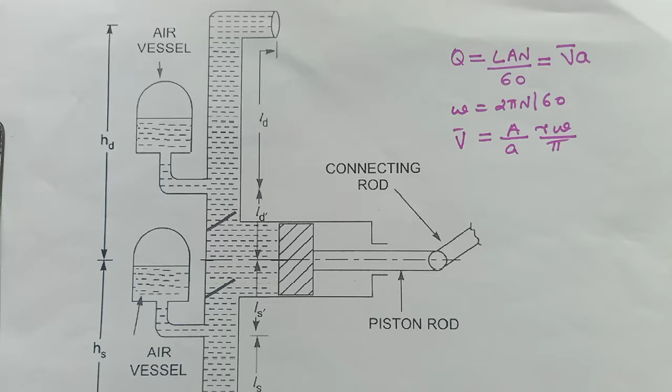Next we discuss the working of an air vessel of a reciprocating pump. These air vessels are fitted especially on single acting reciprocating pumps. The function of this air vessel is when fluid comes into it, the air inside the cavity gets compressed, and as and when required, that compressed air pushes the fluid into the main channel.

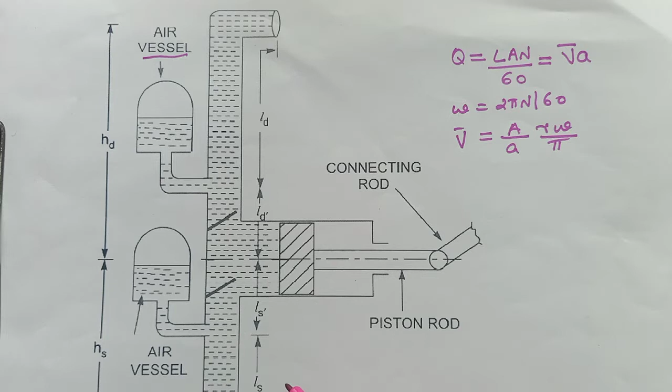So the main purpose of installing an air vessel into the reciprocating pump is that we know the fluid is accelerating and decelerating through the suction side as well as the delivery side. So fixing the air vessel ensures that the flow through the delivery pipe and the suction pipe is almost uniform.

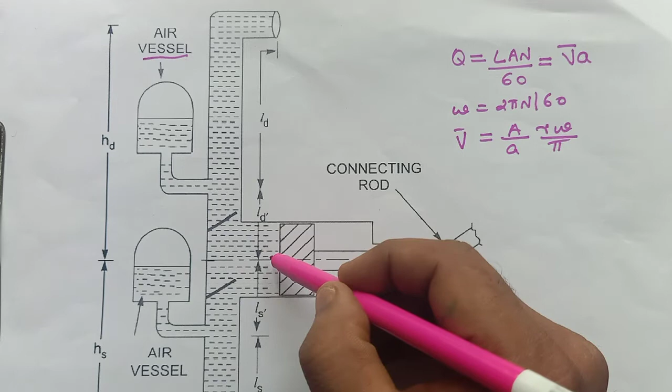This is done by dividing the entire length of the delivery pipe into two parts: the length between the middle of the piston to the entry of the air vessel, and the remaining length noted as LD. Similarly on the suction side, we divide it into two parts: the length up to which the air vessel is fitted is noted as LS dash, and the remaining length is LS.

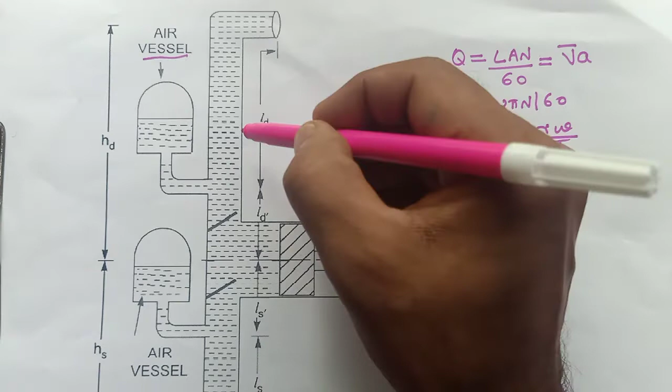So the core purpose of installing this air vessel is to maintain a constant flow rate through the longer section LS as well as the longer section LD. We ensure an average uniform velocity rather than a fluctuating velocity, which would typically occur without an air vessel.

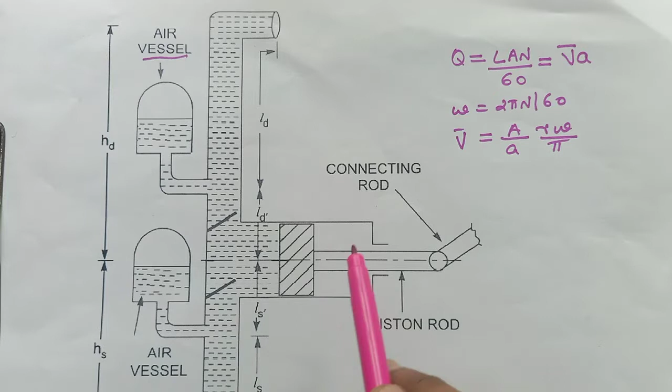Its function can be seen during the suction stroke. While the piston is moving during suction, it is accelerating and then decelerating. From theta equals 0 to theta equals 90, the fluid is supposed to be accelerating. However, the fluid coming through the suction pipe is not sufficient, so the compressed air from the previous stroke allows fluid to move from the air vessel towards the piston during theta 0 to 90, ensuring a constant velocity fluid passes through the suction side.

Then during the deceleration period, from theta equals 90 to 180 degrees, less fluid is supposed to enter the piston, so the additional water coming through the suction side actually enters into the air vessel. So the fluid may accelerate and decelerate in the section LS dash, but we can ensure a constant velocity fluid is moving through the longer length LS.

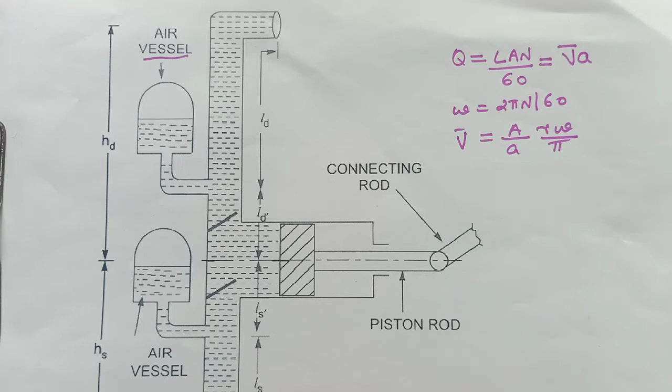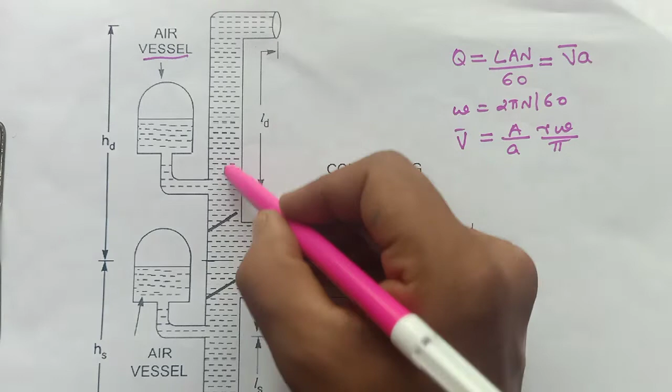The same thing is true with the delivery side. During the return stroke, the fluid is supposed to accelerate; at that time, the fluid compresses the air inside the air vessel, and fluid enters into it. So a constant velocity exists in the length LD, and also from theta 270 to 360, during the deceleration phase, the fluid...

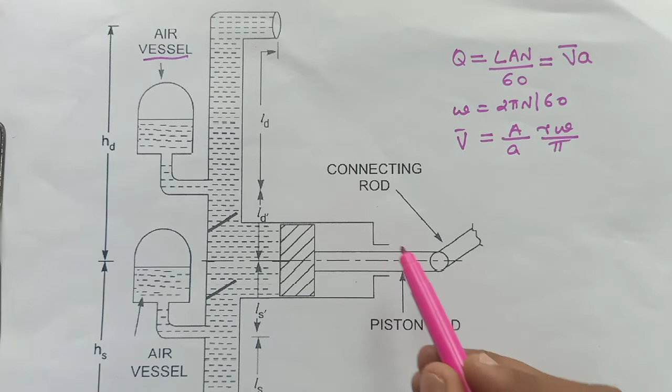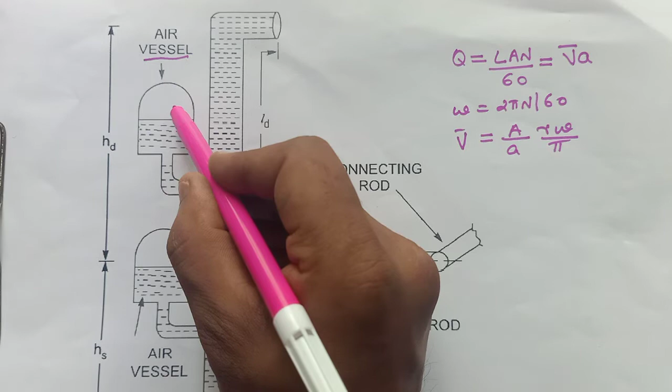The compressed air in the vessel will be pushing the fluid, so that on average we can ensure the fluid is moving with a constant velocity throughout the longer section LD as well as LS. So the flow rate Q is modeled as LAN by 60, which is the fluid actually entering into the piston.

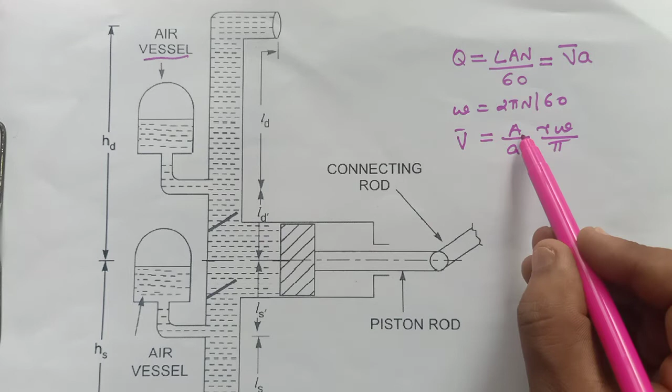So in either branch, the suction side or the delivery side, the fluid is moving with an average velocity V bar, and the area of cross section is A. Further, we know that omega is 2 pi n by 60, so we can model the average velocity through either the suction side or the delivery side as A by A into R omega by pi.

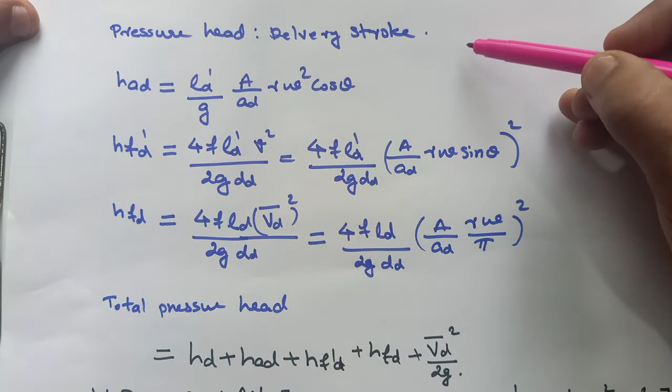Now we discuss the pressure head during the delivery stroke. What happens is the fluid will be accelerating and decelerating only through this length LD dash as well as LS dash. For the remaining LD and LS, we can ensure almost an average velocity V bar.

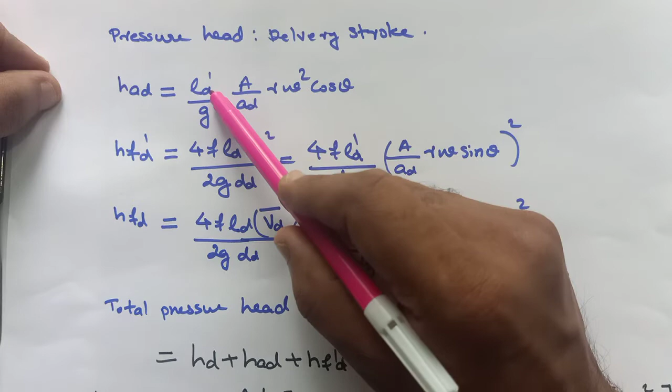So to model the pressure head, the acceleration head is nothing but LD dash by G, A by AD into R omega square into cos theta, as we have done earlier. But note that the acceleration head contribution is only from the smaller length LD dash.

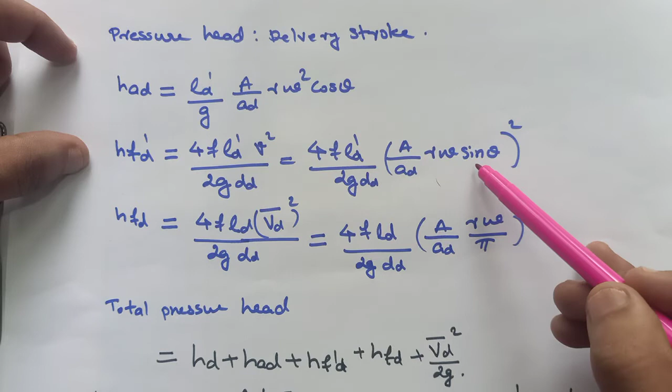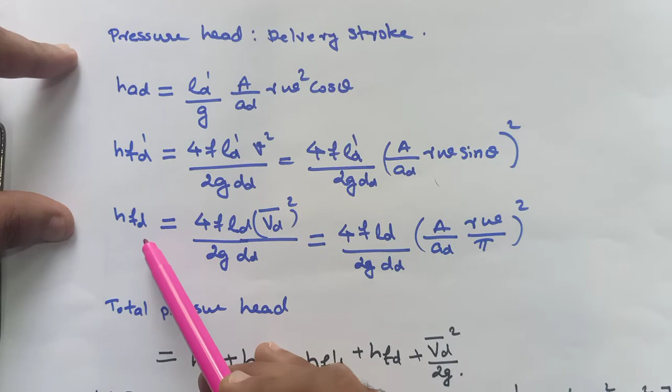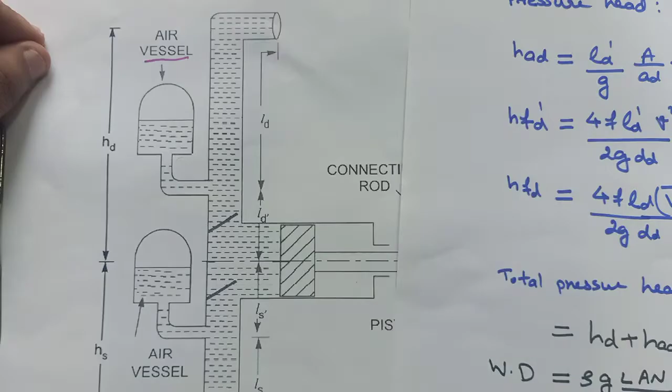HFD is the major contribution to friction on the longer side, which is on the delivery side. What is the friction happening in the longer pipe? That is being modeled as...

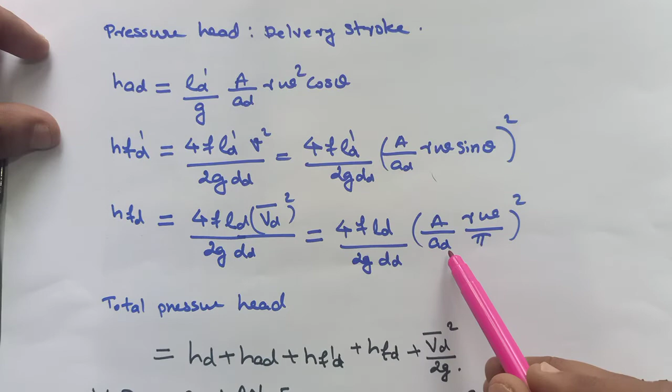4FL d by 2g dd. Here this average velocity Vd is used to model the friction head in the delivery side. So the a by d, already derived as 4FL d by 2g dd and a by ad, here we take the area of the delivery side to obtain the average velocity at the delivery side. Then we get the total pressure head at the delivery side.

This is HD plus HAD, the acceleration head, then HFD dash is the friction head in the fluctuating side as well as the friction head in the constant or average velocity side. Then Vd square is the velocity head with which the fluid is actually moving in the delivery side. So we can establish the total work done from both.

The similar thing is true with the suction side also, and we can derive the same expression in this way. So the total work done will be nothing but rho g QH, or mgh. It is rho g q into the total head, which we can sum as HFS plus HS plus HD plus HFS plus HFD.

Then 2 by 3 HFS dash, since it is the same parabolic curve we obtained earlier. Then 2 by 3 HFD dash also, that is also true, that is the parabolic part. Then Vs square by 2g, and typically we omit these quantities for the analysis unless otherwise specified.

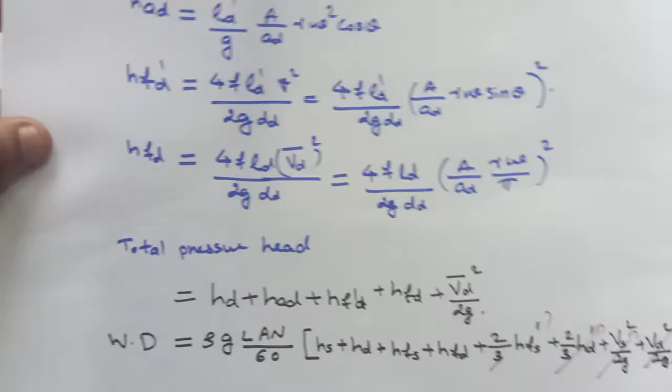So next we see what is the effect of introduction of an air vessel into an indicator diagram. Here we can observe this is the typical curve with which the fluctuating friction head is considered by the change in velocity.

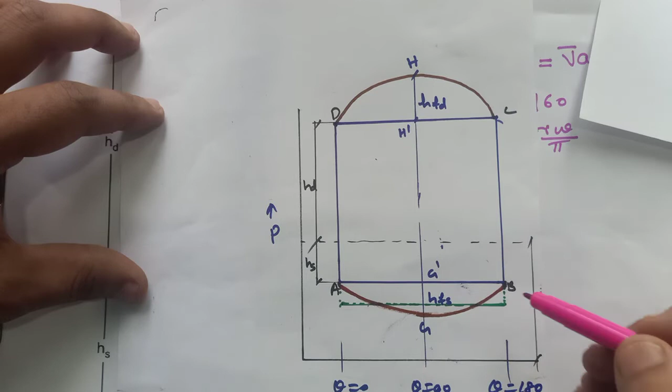So we can even omit a smaller HFS dash, which is the fluctuation friction head due to the fluctuating quantity. In that case we obtain this modified line with which an average constant velocity can be ensured in a majority of the section length. So instead of a parabolic part, we can reduce that to a rectangular section, giving us a saving in our total work done also.

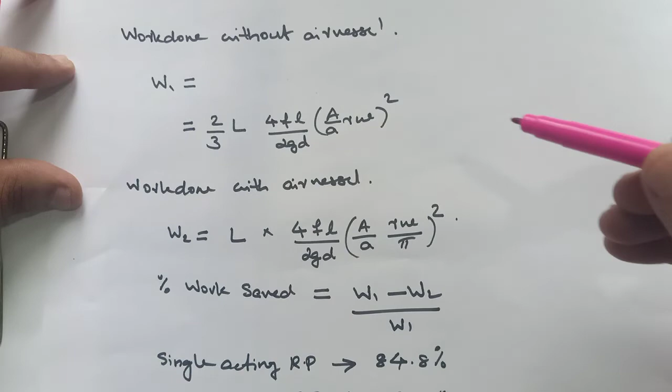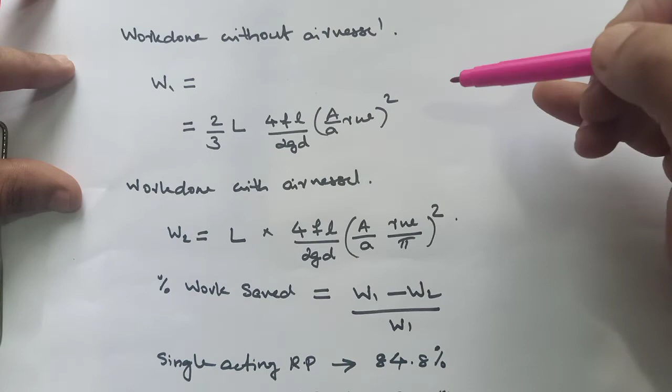So that is being estimated as follows: we can devise the work done without the air vessel. This is the work done without the air vessel, if the air vessel is not fitted. We already derived the expression for it, that is nothing but 2 by 3 into base into the total height, or HFS, so that is without the air vessel.

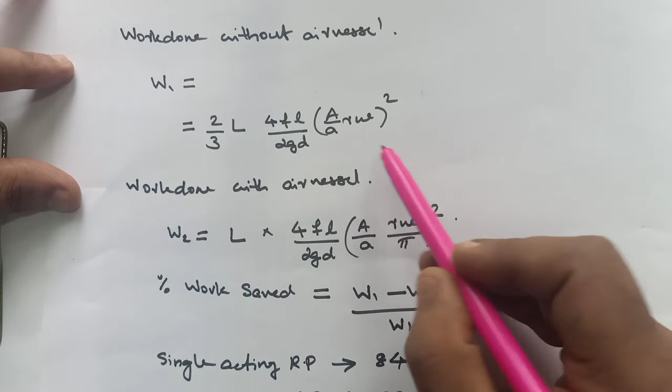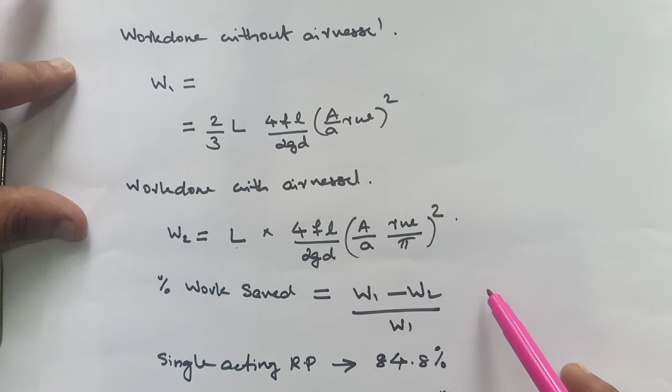That is the work derivation we already done earlier. Now we consider the case with air vessel, which gets modified as we have seen, becoming a rectangular area - that is base into height, where the height HFS is calculated using the average velocity v bar d. So the total work saved can be expressed as W1 minus W2.

This is without air vessel, and with air vessel we take it as W2. So the only difference happens during the work done, the contribution from the friction part. This is the difference that we can notice.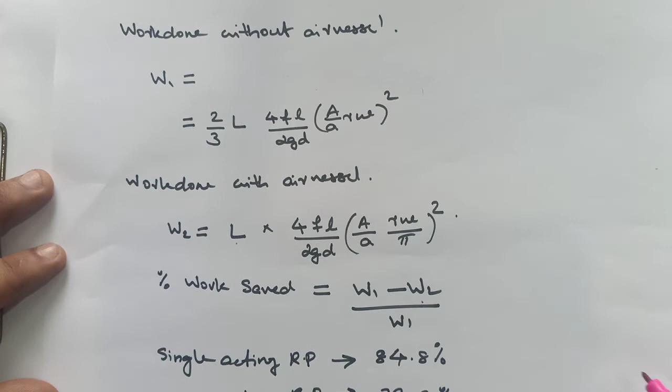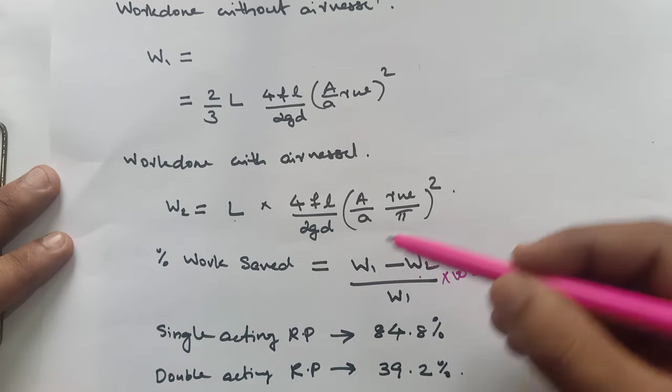Essentially, the percentage work that can be saved is nothing but W1 minus W2 divided by W1 into 100. If we do this analysis for a single acting reciprocating pump, we get a saving in work done as 84%, and for a double acting pump the saving in work obtained is 39%. This is why we install an air vessel, especially in a reciprocating pump, so that we can go for higher speeds without cavitation occurring.

So now we do a numerical problem regarding this.

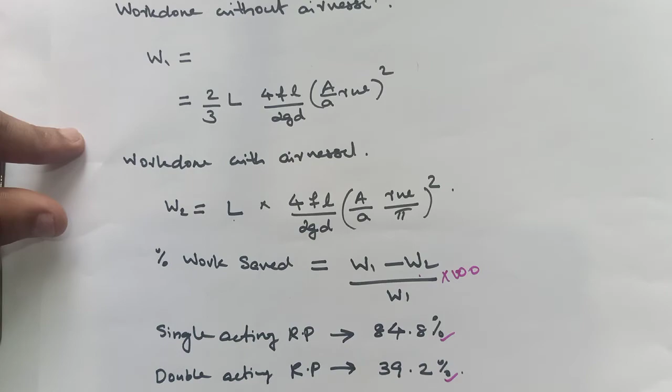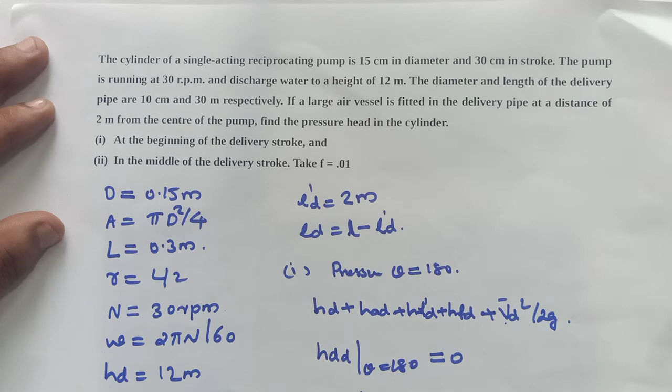The cylinder of a single acting reciprocating pump is 15 cm in diameter and 30 cm in stroke. The pump runs at 30 rpm, discharging water to a height of 12 meters. The diameter and length of the delivery pipe are 10 cm and 30 meters respectively. If a large air vessel is fitted in the delivery pipe at a distance of 2 meters from the center of the pump, find the pressure head in the cylinder at the beginning of the delivery stroke and in the middle of the delivery stroke. Take coefficient of friction f equal to 0.01.

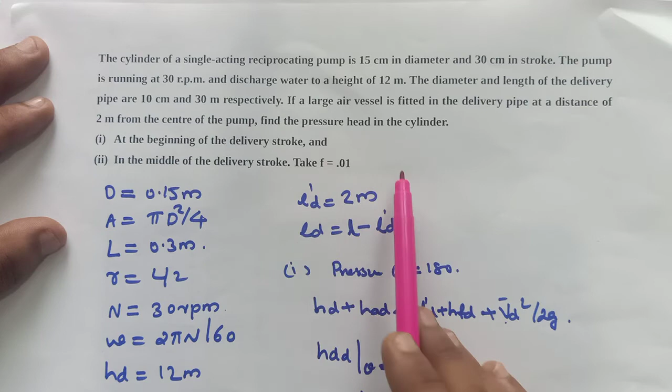The data is provided as capital D, the diameter of the piston, is 0.15, so we can estimate the total area of cross section of the piston. Then the stroke length L is provided, from which we can estimate the crank radius. The speed n is given as 30 rpm, so we can estimate the angular speed by 2 pi n by 60, and hd is given as 12 meters.

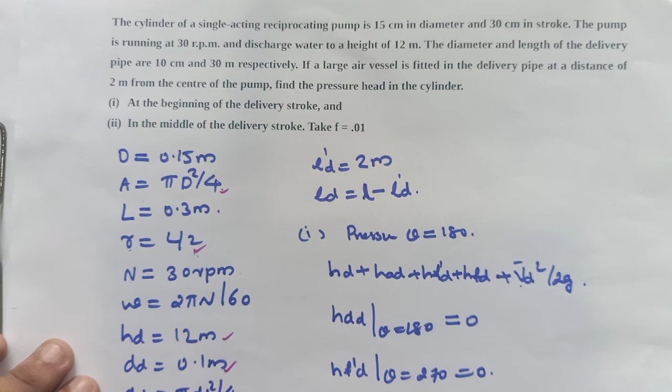The diameter of the delivery side dd is given, so we can estimate the cross sectional area of the delivery side too. The total length is given as 30 meters. The L dash d is the distance from the center of the piston to where the air vessel is fitted, which is 2 meters. So the remaining length will be the length of the delivery pipe, where the fluid moves with an average velocity Vd dash.

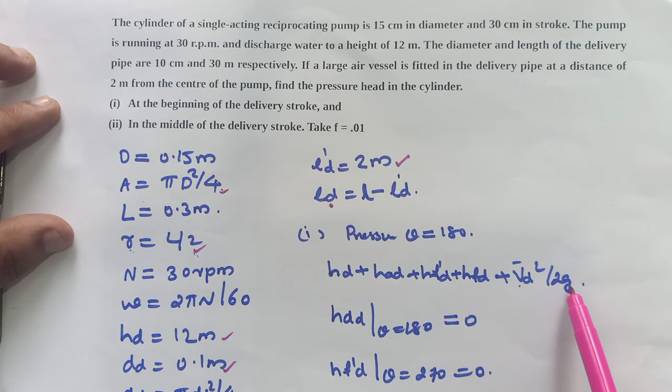Then pressure during the return - this is being asked at the delivery side, at theta equal to 180 degrees. The general expression is hd plus had plus hf dash d, then hfd plus vd bar square by 2g. But we can see that the acceleration head at the beginning will be 0, so this can be omitted, and the other four quantities can be added from the data provided.

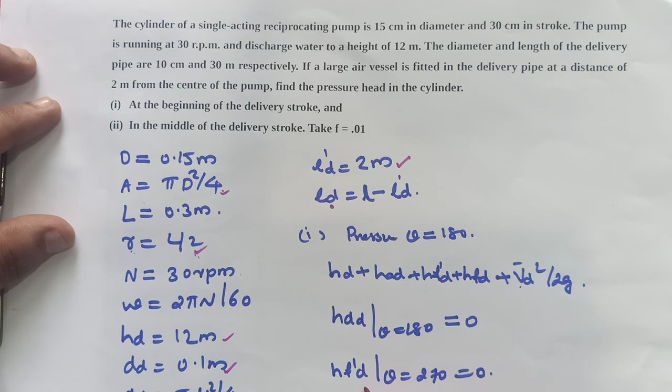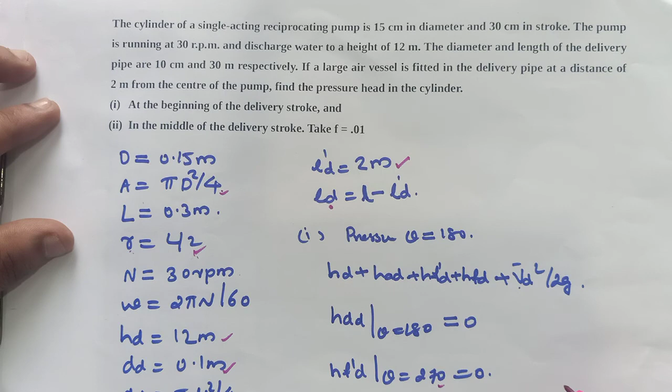At the middle of the stroke, what happens is the fluctuating quantity, the acceleration head due to change in velocity, will be 0, so this hf dash d quantity will be 0. We add the other four friction heads to obtain the pressure at the middle of the delivery stroke, at theta equal to 270. This also you have to add as part of the third assignment.